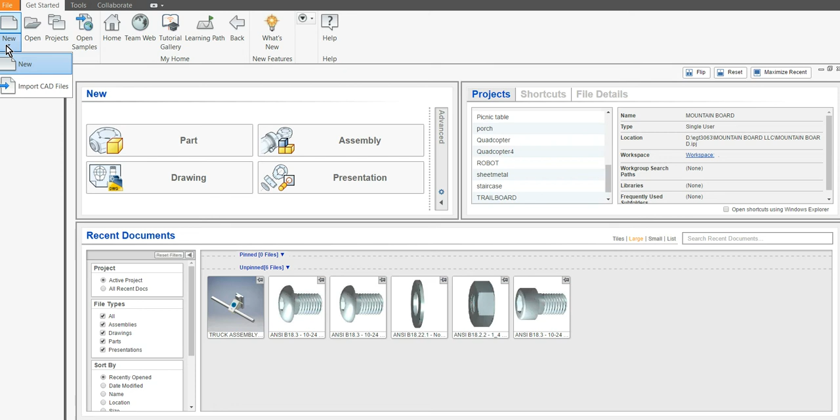Okay, so we want to start a new assembly. You can pick this button or hit new assembly. When you pick new assembly, make sure you don't pick a weldment. We're not doing weldment IAMs yet, we will be eventually. Just make sure you pick a standard, or the one over here as well works too, so just don't pick weldment yet. Just like don't pick sheet metal part unless you're doing sheet metal. It's saying that it's going to be an ANSI.

And the first thing we want to do is place the board in. You always want to place usually the part that has the beginning, or the bottom, or has the most parts attached to it, and that would be the board.

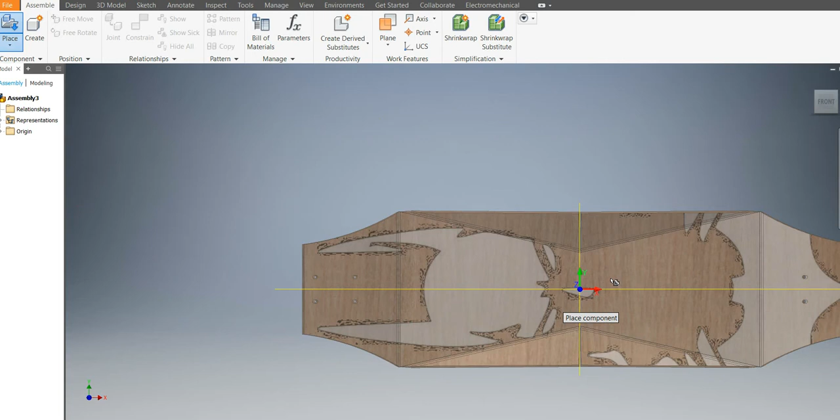Right there it is. Hit open, and this is a big deal, a lot of people forget to do this. The first part that comes in, always right click and place grounded at origin. Don't forget to do that.

All right, now I'm going to turn these planes off here in a minute and show you how to make a couple in case you run into that too, because that's another problem some students run into.

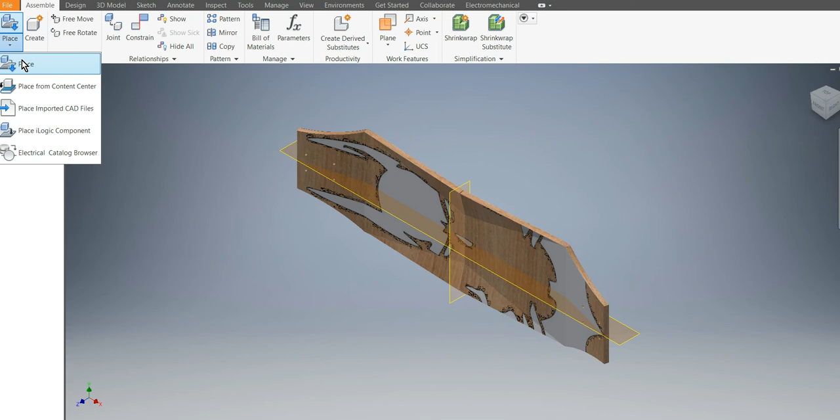Next thing we want to do is bring in our sub-assemblies that we made. Hopefully we don't have any problems with it. If we do, I might have to pause the video for a minute. So I've got my mountain board truck here without any nuts and bolts in it.

I'm just bringing in one of these because we're going to mirror them over. I'm not bringing in two, even though there's two there, and I'm doing that on purpose. And I'm going to place my wheel assembly. Notice it says IAM for wheel assembly, right?

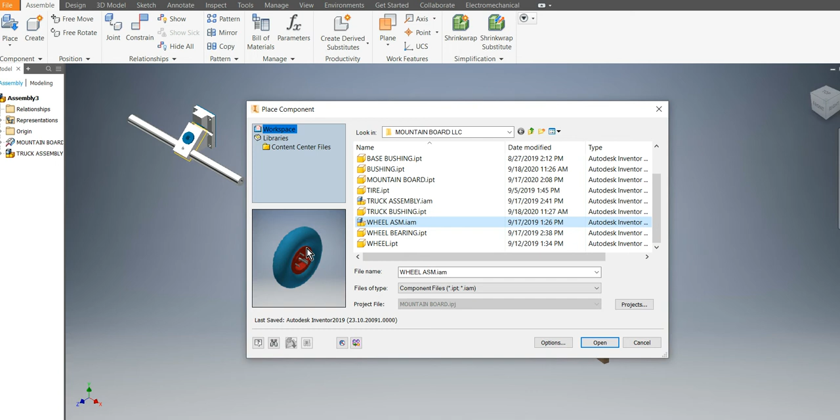Okay, I had a little bit of trouble with the wheel, so I'm going to show you what happened. So I'm bringing in my wheel assembly. I did put nuts and bolts on it the other day, and see what happens — I must have done this on the server because it can't find a 1/4-20 1.5 inch bolt. It says it doesn't know where it's at, so I'm just going to skip it. And it can't find the 3/8-16 bolt in there either, it must be a nut, so it can't find it. That's all right, it just says it can't find it.

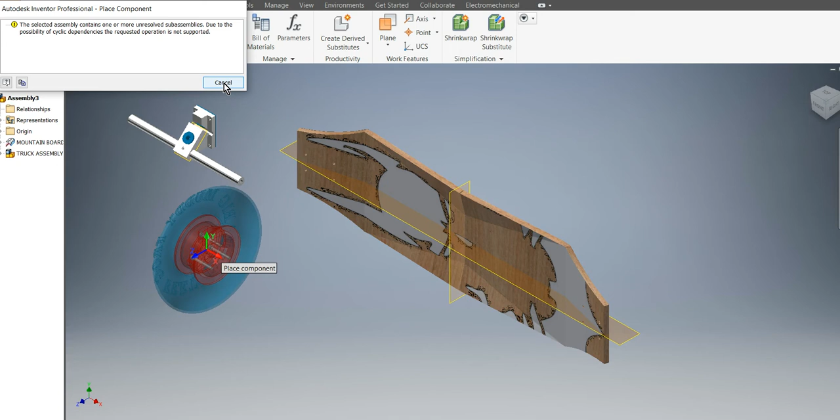What I was talking about with that wheel was that, just as I was worried about, it had problems with the nuts and bolts. So I actually had to open the wheel itself in a separate file, just open it and delete those bolts out of there so it quit giving me errors. So you might have to do that if you have extra bolts in your subassembly and you can't find them back.

Okay, I'm just bringing one in again. Let's put some bolts on. Let's do the wheel first, put a few bolts on it. We'll save it, and then we'll bring it back in.

So to open this subassembly, it's real easy. Just double click on it there, or double click on it here. Okay, now I'm in this subassembly.

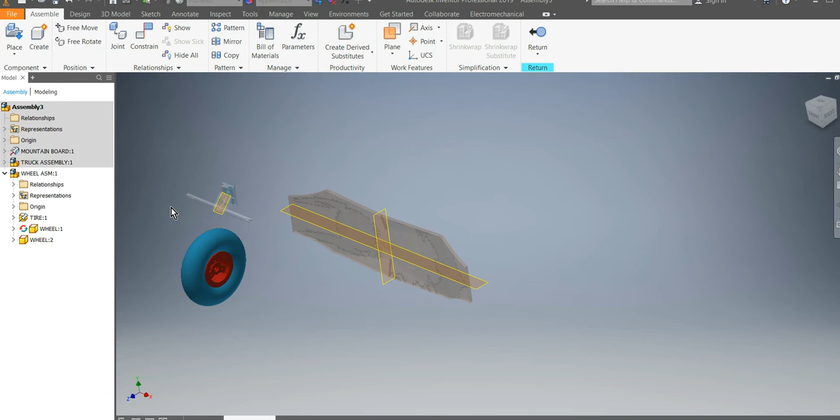These are grayed out. Incidentally, the way I changed the colors of these items, I just hit return to get back to the thing. I'll show you real quick here. So if I want to change the color of an item, I can just double click on that part. It opens that part, or opens that subassembly. Now I'm double clicking on that part and I'm in that part. I can just change it to whatever I want color wise.

Medium sky blue. Okay, it was already that color anyway because I did it in the subassembly, but you want to do it in a part, and then you want to save it if you want to keep it that color, before you return.

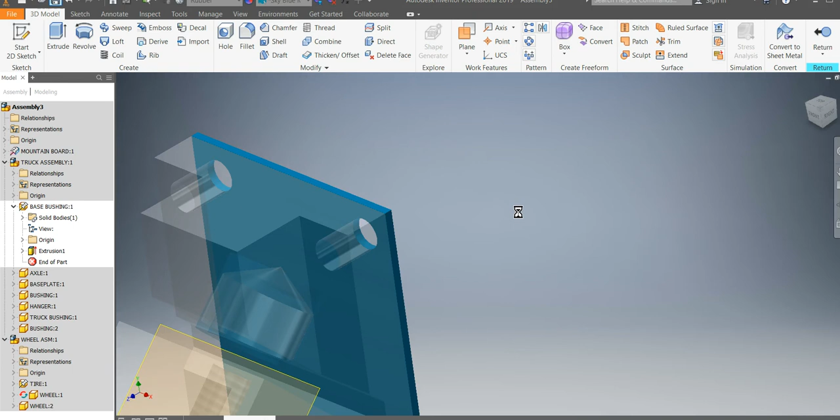Okay, now I'm returning to the subassembly. I just hit return, I'm back in the subassembly. Hit save. Now I'm going to return to the main assembly, because you got to remember you're stepping down here. I was in the main assembly with all these and subassembly, so now I always save again too, just to make sure everything keeps saving. Return. It should say yes to all when you do it anyway. But that's how you change the color of any item.

Just double click it. I'm going to add some bolts to this subassembly, so I'm going to double click on it. Now I'm in this subassembly. Notice all the parts are there. I'll have to return to get back into the main assembly. The subassembly is just like a big assembly, except you can bring one piece in at a time.

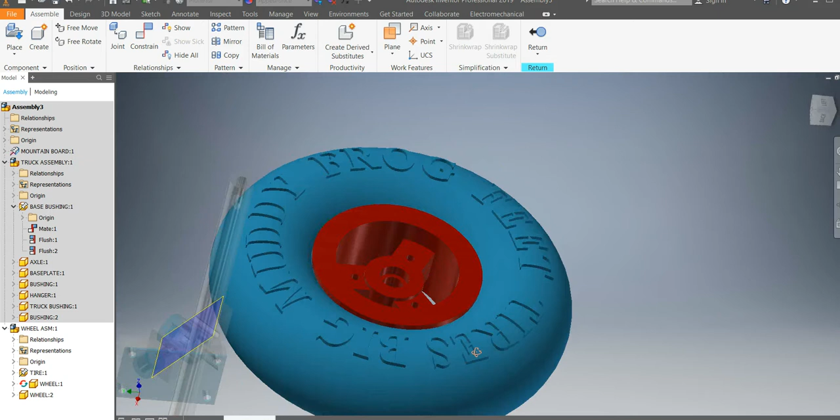Okay, this wheel looks real good. Everything looks right on it. This is the outside of the wheel, so I'm going to want to put the bolts there and the nuts on this side because it just looks prettier, right? So let's do that. We'll go to drop down to place from content center.

If I look at the example here, it says number—what bolts are there? There's a nut, 15. There's bolt number 14 right here. So 14 and 15. It says quarter 20, 2-inch long, hexagon socket head cap screw. That's the bolt. The nut is number 15 in the item number, right? There's 12 of each of these because it's 3 in each wheel and there's 4 wheels. It's a quarter 20 nut, hex nut. It's real simple. All right, so let's make sure we get those only.

So you always look back at your bill of material to figure out what nuts and bolts you have. It's all in here on the balloons. So you can track it down by item number. The balloons match the item numbers, quantities match how many are on there, and of course the parts list has the type in the description.

Okay, so let's go back to Inventor here. All right, so what I did, it remembered where I was last time I was in here, so yours probably looks like that. So first thing you want to do is double click on fasteners, okay, and then bolts. Notice there's a lot more other items in here that we're not getting into: tube pipe, shafts, sheet metal, molds, washers, rivets, everything. There's also nuts, bolts, belts, and everything else in this thing.

Cables, harnesses. All right, so we're in bolts, and it says socket head on that bolt. So we want to get that, that's an industrial bolt. So you would see these all over the place. They take a little Allen wrench to use them. You see that? Looks like usually typically like that, with a little Allen wrench hole in the top of them.

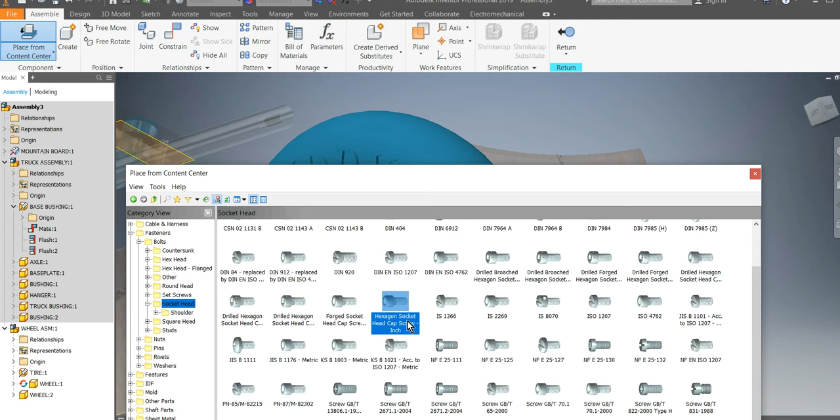And about halfway down is just a standard hexagon socket head cap screw. These are the kind you could buy at most hardware stores, Rural King and so on. Okay, I'm just going to double click on it. Now be careful, if you zoom in too big, it'll try to put a giant one in here. So what I'm trying to do is hover over that circle, not the cylinder, just the circle. And I waited too long, so of course it gives me different options. So I'm picking that circle.

Now you get several options here. One is auto drop, which is fine if you designed it perfectly to match the programmer's intent here. But I always make my bolts true size so they line everything up. Now in the real world, you'd usually make the bolts a little bit oversized and you'd have dowel pins to help line this thing up. But that's a lot more work, so we didn't do that. And it doesn't make a big difference on this plastic wheel that's 3D printed.

Okay, it's got an inner tube on the inside of it. So this will auto drop the wrong size bolts. So the first thing I have to do is change size, which is that one. And there's different ones here. You can change size here by dragging; that will change the length of it, but it won't change the diameter of it, I don't think. Let's see. See, it's giving me a 10-24, and this thing's supposed to be like 2 inches long. I think 1.5 inches is plenty long, so I'm only going to go that long.

But I still got a problem. It's still the wrong size. It's supposed to be quarter 20 because it's making it undersized. Now it did auto drop these even when I picked change size, which is awesome. Sometimes that doesn't work. Notice it auto dropped in 3 spots, even though I just picked one. So there's my quarter 20. It already is 1.5 inches because I drug it that far. It's coarse instead of fine. It's what I want. I hit OK. So those are done. Now if it doesn't auto drop, then you got to do it 3 times.

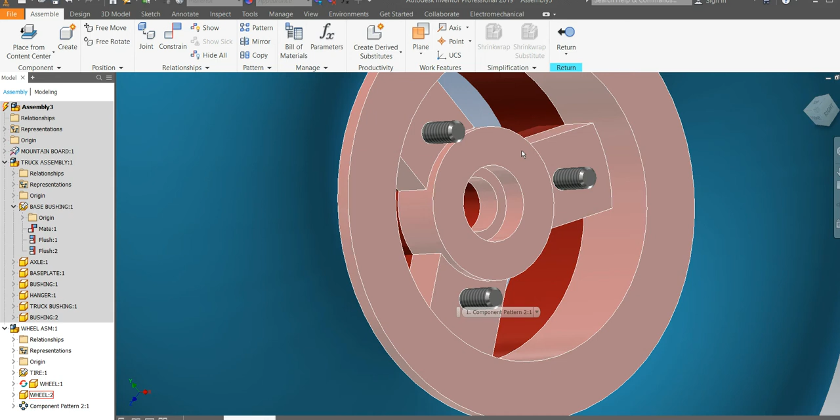Okay, so that's finished. And if it's on your laptop, they'll stay there. If it's on the network, when you log off, they're going to be lost, and you're going to have to hit skip when you load in this assembly, because it won't be able to find that file because they'll be gone. All right, so now I'll put the nuts on too. It's kind of the same way. Place from content center, and it's awful slow, isn't it? Okay, so there's the bolts. I'm gonna shrink that down a little bit, and there's washers, nuts.

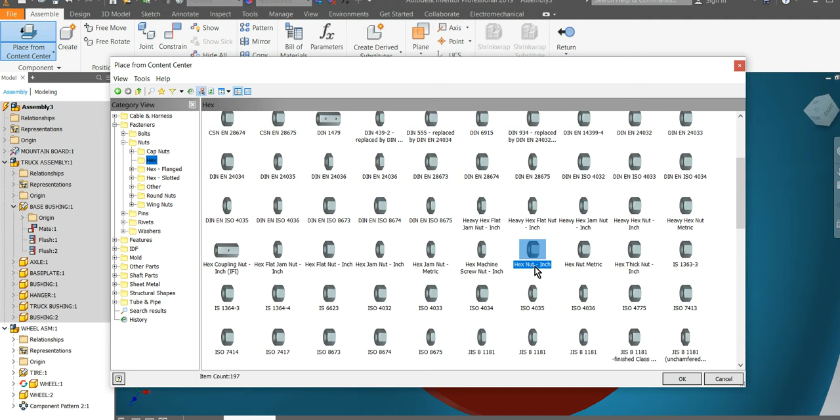Okay, hex, just plain old hex, nothing fancy here. I usually try to pick the standards you'd see everywhere else. So hex, nut, inch. Doesn't get any simpler than that. Okay, and now it tells you what to look for. Select a threaded cylinder. Okay, there we go, got it. And now what's it say to do? Select a planar face. Now that's the face the base of the nut needs to be on, which is right here, not the base of that, right?

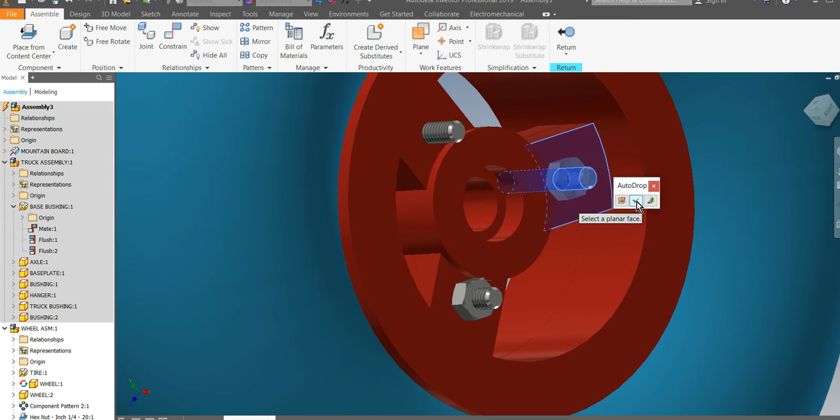Okay, and now auto drop. I think I can hit check mark here. Let's pray it works. Should. Nope, it didn't. So anyway, pick that one. Pick this face. It's semi-automatic, right? Cylinder and face. Make sure you get the right face. Don't go too fast and get the wrong face. Then you have nuts in the wrong place there. So right click and hit apply when it's all done.

And you can change the size here, I guess, a little bit, but it did it right, so I'm not going to. Okay, and it wants to do more, so I can just hit escape at this point because they're all in there. All right, now we've got our nuts and bolts in there. Now I want to make sure I save this before I return. So save. So this subassembly now has nuts and bolts in it, and it'll stay in there until you log off of VMware. Okay, return.

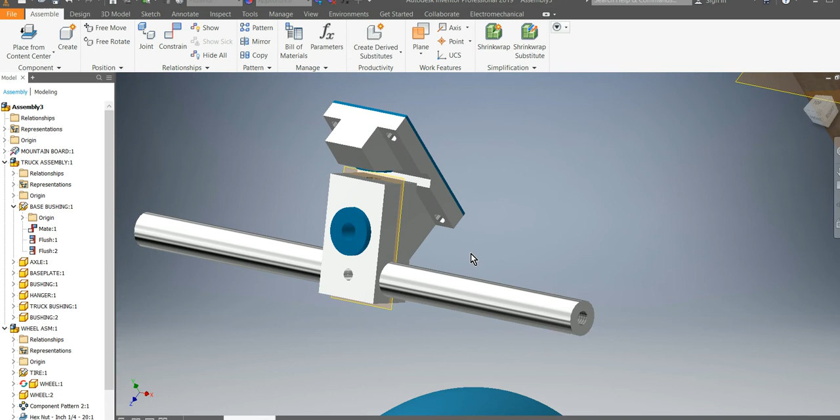So now I'm back in the big assembly, and I have nuts and bolts. You would do the same thing for this. You don't have to, but the nuts also go in this, and you can see them on a bill of material. All right, there's a bunch of bolts and nuts holding this whole thing together.

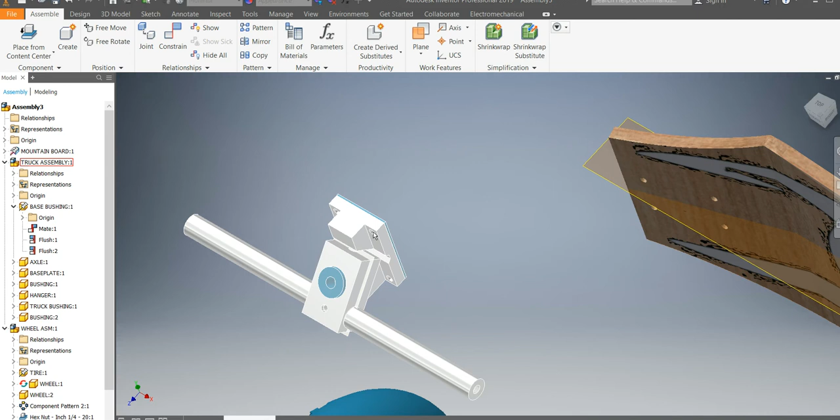All right, I'll show you how to do a few more here in a minute. I think we will put the nuts, and I do want you to put the nuts and bolts that hold this base plate to the skateboard. So let's go ahead and put them in there too, because I just want you to get some more practice on it. And so I'll do it as fast as I can here.

So place from content center, place from content center. Okay, if you look at bill of material from memory, these are 10-24 button head cap screws. Okay, so what a button head is, it's round, so when you put your feet on this skateboard here, it doesn't bust your toes on it. So they are in, of course, fasteners and bolts, and they're on a round head. You'd think it's a socket head or button head socket head cap screw, but they are in the round head.

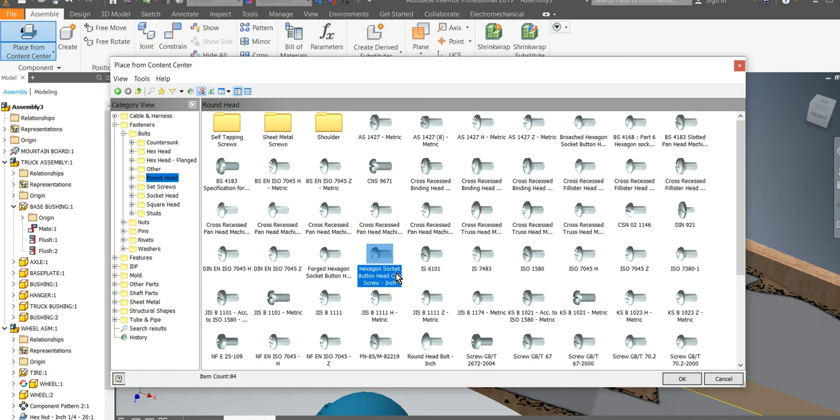And I think it's about 4 rows down. Here it is, hexagon socket. So it's similar to the other ones except it's rounded. Okay, that's a hexagon socket button head cap screw. These are also, you'll see them like every maintenance shop has a million of them because machines carry them. Okay, now this one, I don't think it might pick the right size. Yep, it actually is picking the right size. Hallelujah. All right, so I'm gonna pick that, and now I should be able to hit auto drop because it looked like it picked the right size.

It's 1 inch. I don't think that's long enough. Oh boy, better look at the drawing here. Thought I had my memory here. 18. It is 1 inch. Okay, I guess 1 is long enough. Okay, and it says it's, how long was it making it there? It's making it 1, good. I think it made it the right size. So if it doesn't, drag that red thing along until you get 1. If you have to change the size, there's the change size.

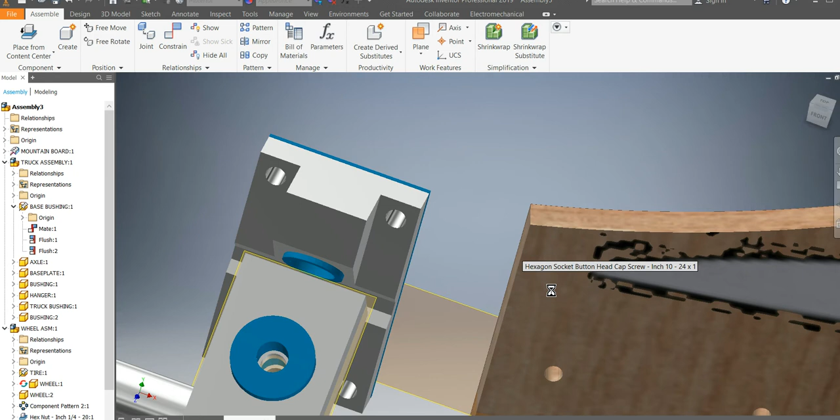It's going to drop all 4 of them in, hopefully. Picked auto drop there, and you can see the red circle showed up. Check mark. Yep, looks good. And our coarse version of them. 1, 2, 3, 4. Now I'm gonna just right click and hit apply, or I should have right clicked, pick done. Okay, I got one sitting in nowhere land, so I should hit done. All right, so pick that and delete it. Let's do keyboard. Okay, left pick it with your mouse and hit the delete to get rid of anything.

All right, so it looks pretty good. I've got most nuts and bolts in this. There's a whole bunch of them yet in this, but we're not going to do them. All right, so let's try to put this thing on here. If you have these planes available, so you can mirror things, that's awesome. Say you don't, because we're going to basically put these on the correct location and then mirror them around. If you don't have these planes available, there's a couple ways to make them.

All right. So this is a board. So I go over here to my browser and find board. It's the first one I put in. And notice it's grounded. All right. It's got the grounded mark on it. So I'm going to expand everything until I see those planes. There's one plane right there. So if you ever want to hide them, well, this one's already hidden. These two are not hidden. I kept expanding. Now these are the two mid planes. I must have opened them when I saved them.

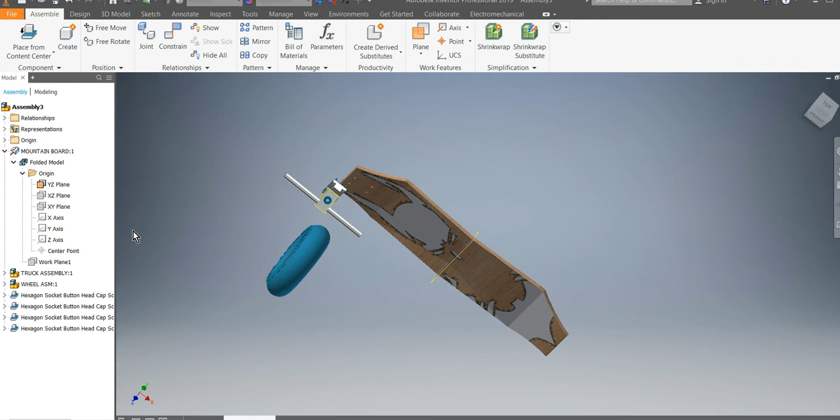So if you want to make them visible and invisible, you just pick on them with left mouse and right click to make them visible, and left click to make them there. Now they're invisible. Okay, so I'm just right clicking to get that menu. All right, so I want those visible. Say I didn't have them though. I got kind of lucky they were in the origin there. But you should have them because you made the board. But if you don't have them, you can make the planes too.

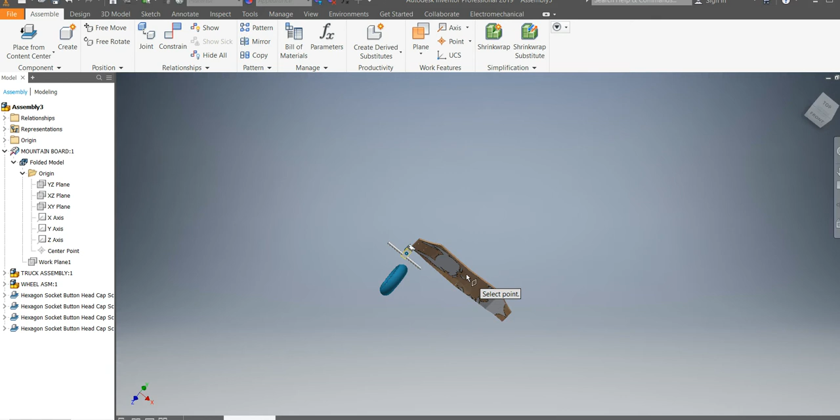Remember how I talked about making a plane with 3 points? All right, so let's make one that's in the middle. So I go to plane. Two easy ones, mid plane between two planes. You could pick two planes and make it in the middle of that one. If that doesn't work, the tried and true method is always the midpoint of 3 lines that cross each other. So 3 points. So as long as I didn't mess up designing this, I can pick the midpoint of that. Any 3 points that are going to make this plane.

I can't see the bottom of it. There it is. So those 3 points split this plane right in half. See, and I could do the same thing from here, here, and down there to get the next one. And I'm not going to do that. I'm just going to turn it on. But if you need to make another one that splits it, you can always do that with 3 points too.

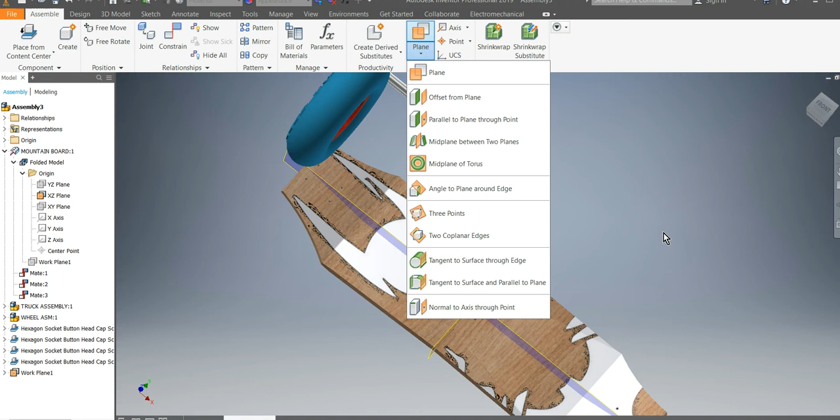Okay, or use a mid plane. There's lots of options in here. I use that one a lot. I use 3 points a lot. Offset from any other plane, however many inches you type in, use that one a lot. I don't use the rest of them very often. Once in a while you want to make a tangent one. Okay, or a normal through. If you get real complicated stuff, you might have to make something normal through a point. There's a lot of ones that you have to use once in a while there.

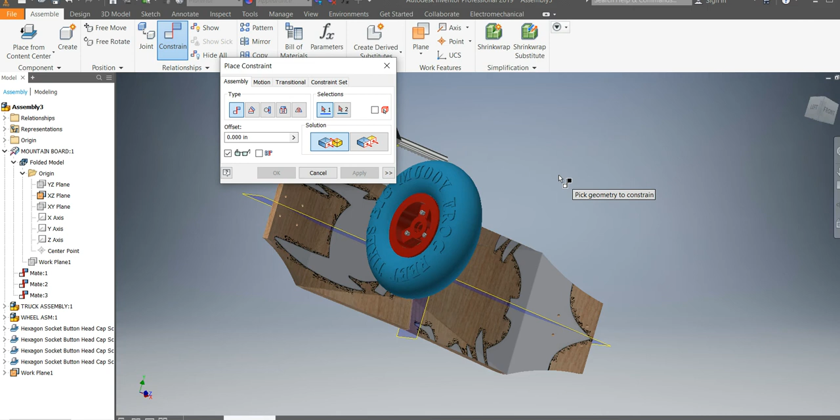Okay, so we're ready to put these parts on there, I think, and mirror them around. There's a couple tricks here. First, we need to constrain them. So I don't know, I guess put the wheel on first. That way it'll lock in. So there's a couple things here you don't really know about.

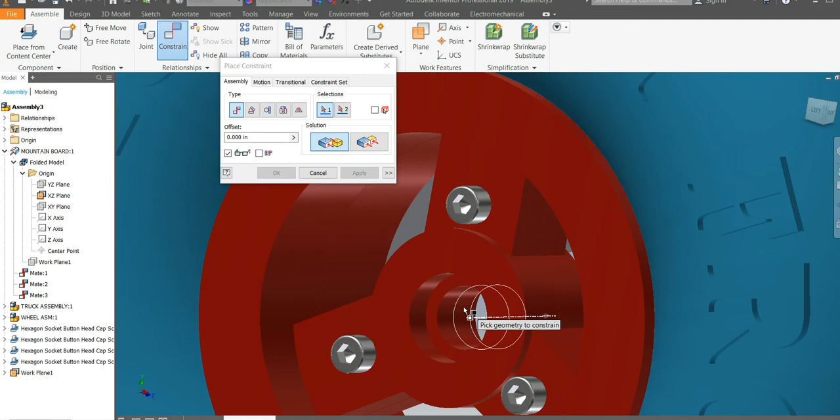So this bearing, there's a bearing that sits in this cavity. Okay, so we didn't put the bearing in it because it's hard to find it in the place from Content Center, and it just doesn't work as perfectly. So I'm not putting it in there right now in the interest of time. But there would be a bearing, and so the shaft sits flush with right here, and so does the bolt that holds this thing on. Okay, because there's a bearing that takes up this whole cavity. So just so you know that.

All right. So first thing we want to constrain. Let's just constrain the wheel to the shaft. So we find anything with a center line. See that center line I got right there? Okay, and a center line with this one. Okay, and then a lot of times you got to pick a line. Okay, and apply. As long as those aligned, it'll let me put it about anywhere I want. Did it spin? It spun it around. Okay, see how? I'm glad that happened. I can show you hopefully how to fix it.

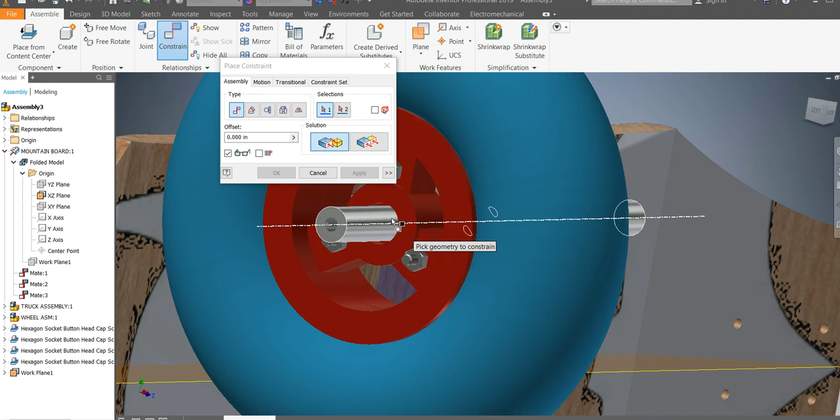Notice now I've got my nuts and bolts on the wrong side. Well, I've got a couple options here. I could put this wheel on that side and then mirror it later, and it'd be fine. That's what I'm gonna do. Or another option is I could just pick this face and this face, and it should flip it. Apply. And they gave me an error because when I aligned it, it didn't like it. So I'm just gonna pick this face in the back of that other one and take the easy way out. I could delete that constraint and pick opposed on the other one. It probably would have worked.

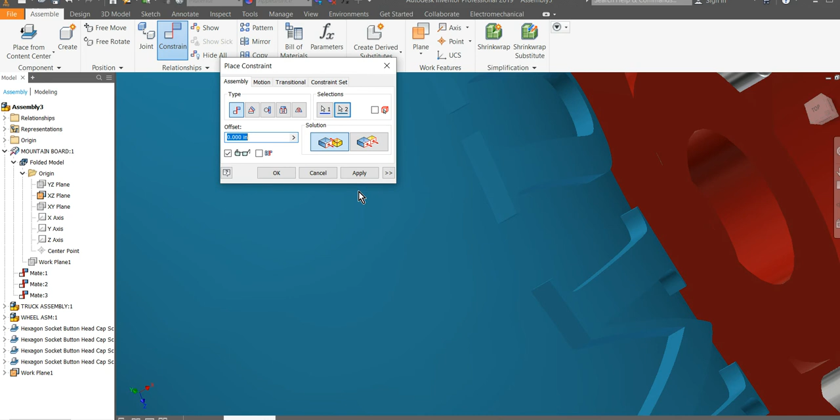Apply. Okay. Alright, so that constraint I was talking about, all these things like this wheel assembly, if I expand it, those constraints I made are always over here, and they're the last things I did, so they're right here. There's the first one I did that was causing a problem. You can right click on that and edit it, and I probably should have picked opposed, and then it wouldn't have flipped it. Alright, so you can always change things after the fact.

You can always go in there and delete them too, because if you keep doing more and more constraints and not deleting the ones you just did, of course you're just going to break the crap out of it. So it only took 2 constraints to fully lock this wheel down because it's supposed to spin. See how it's spinning? Okay.

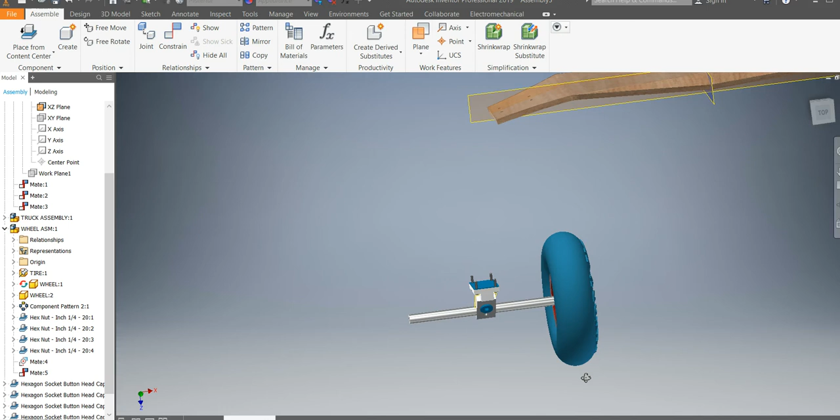And use colors to make your design cool. I know it's hard to buy things that are blue wheels and so forth, but it does make them look nice. And you can buy some things like that if you sell them, if the colors bring really good views to your designs. All right, so let's mirror this over to the other side.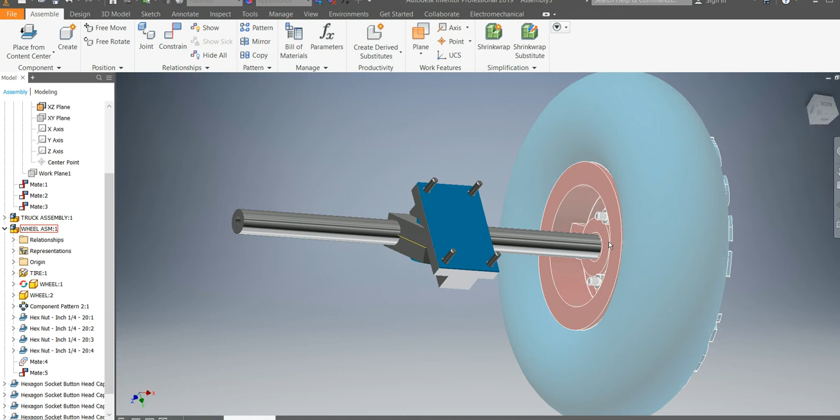You can kind of pick your battle, which one you want to do first, right? I'm gonna go ahead and put this on the board first and then mirror it, I guess, because it'll just be easier. So I'm gonna hit constrain now, and I'm going to have to line up this base of that rubber bushing with the back side right here, right? And it doesn't matter if you do this one or that one, they're the same thing anyway, so I'm just going to pick this one. Okay, and that lined them up, hit apply.

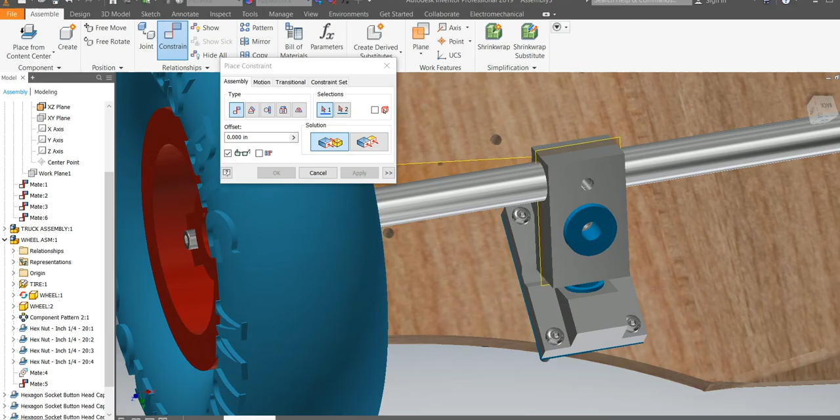Now you got to start thinking a little bit. Okay, so if you look at the trail board, the big bolt that holds through the two big bushings is on the inside of the board. See that big bolt's on the inside, so make sure you do it, because you can do it backward and it actually does work, but of course when you lean on your board it won't turn very well, but it will fit on there. So the big bolt going through these two big bushings right here is on the inside of the board.

So to do that, you have to put the bolts where they're theoretically possible, or Inventor will give you an error. So I'm going to put this bolt in that hole, and then I put this bolt in this hole. I can't put this bolt in this hole and then try to put this one in this one, or cattywampus over here. It just won't reach. It won't work. So you got to think about things when you're doing them a little bit, right?

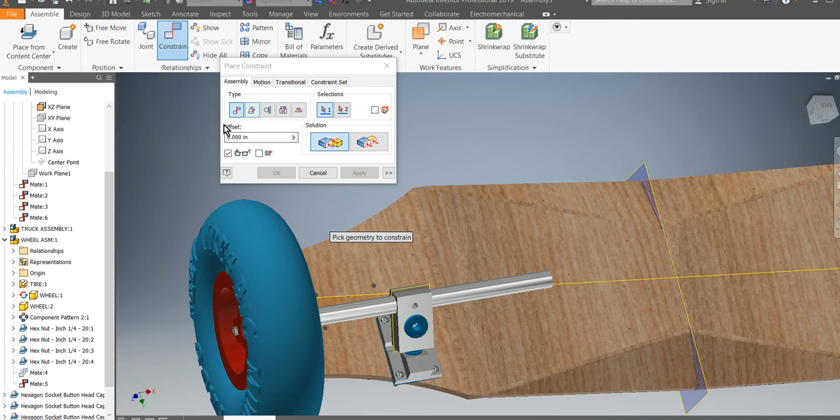So I'm going to pick this cylinder, and I've already got planes lined up, so I know they're the right height, and this cylinder. Tape and apply. Okay, and I'm going to close this so I can actually see. You can pick through the part, but it's pretty hard. So I just closed it so I could spin it a little bit and see everything a little bit better. Go to the back side so I can see it even better. Constrain. And I've got that one in, so I've almost lost where I was at here. That cylinder and this cylinder. Okay, and if you pick the wrong one, of course it won't work because it's not possible.

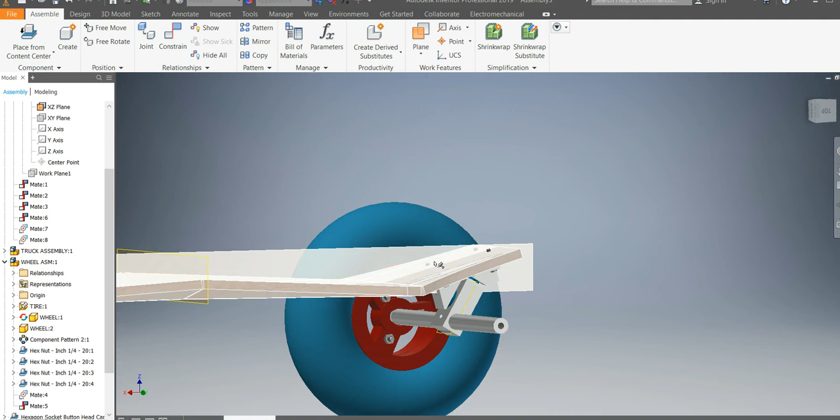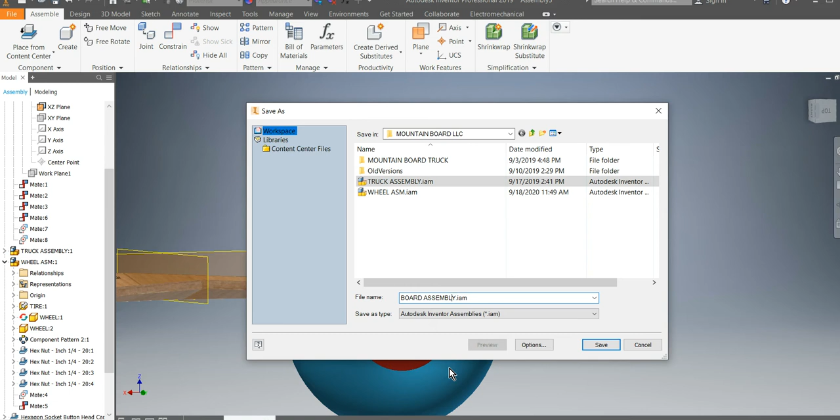Alright, so now I've got this thing on the bottom, and I've got one wheel on it. And that's about the hardest part. It gets pretty easy after that. I've got lots of center planes and everything. It's a good place to save probably. So save. I'll call this board assembly, I guess. All caps. Now mine shouldn't lose the nuts and bolts. I always say yes to all. You always want to save everything. I don't know why you'd want to not save everything. Okay, it's saving everything now. Alright, I think we're ready to mirror.

Now one thing about when you mirror things: all the parts that are mirrored together will keep all their constraints together. But I'm going to mirror this across the shaft. Now this is attached to the shaft, but I'm not mirroring the shaft because I'd end up with two shafts. Well, since I didn't mirror the shaft, it's going to lose the constraints between the wheel and the shaft, and you just have to reapply them. That's the way it is. Either that or don't ever move them. But the right way is to reapply them.

So mirror, and I want to pick on that subassembly. Okay, and if it's a subassembly, it'll pick them all, which is cool. That's one of the reasons I put the nuts in there before that. Notice that most of these are green, except for the nuts and bolts. Make sure you pick that so they turn yellow. Because otherwise, unless you want a new part, it will actually create a new part with an MIR on the end of it, and you'll have a whole bunch of new files.

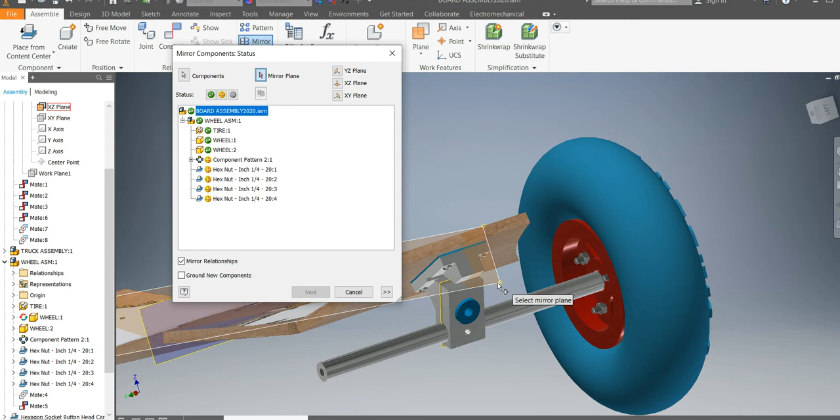Okay, I'll show you. So if I leave this green, it wants me to grab a mirror plane, so I'll pick a mirror plane, that one that's actually in the middle that's going to mirror across. Okay, and if I go to next, see all these new parts I'm getting? I don't want them. It's actually going to make them. So where's back at? Return to selection.

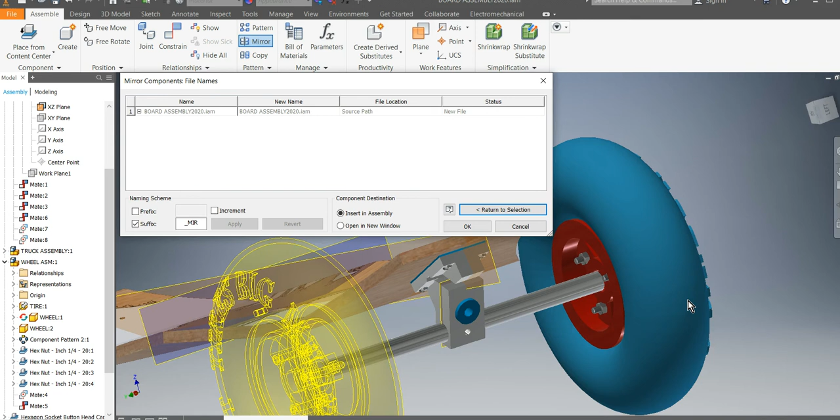Make it yellow. Next. And if you're going to modify them and put holes in them that are different than this, that's the way to do it. But rarely do you do that, which by default it was the other way. Alright, there's no new parts, so hit OK. So I've got that in here.

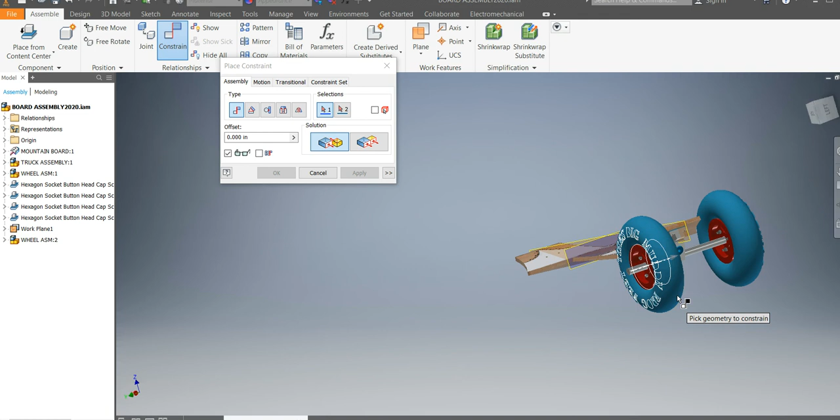Now notice this thing moves. It's not locked on anything. We just lost everything. Well, that's because we didn't mirror the shaft. We just mirrored the wheel. Okay, so now we've got to constrain it again. Constrain, it's pretty easy anyway. Pick that, pick a cylinder, apply. And hopefully it went to the right one. It surely did. It didn't flip, did it?

Good. And then I'm gonna drag this thing over here so I can see what I'm doing. And then again from this face right up. It's not letting me pick that, so I'm gonna cancel. Drag it out of there, maybe because I moved it. Constrain this face. I did get the other one already on there though, and then this face. Okay, make sure you get the right faces. I did that pretty fast.

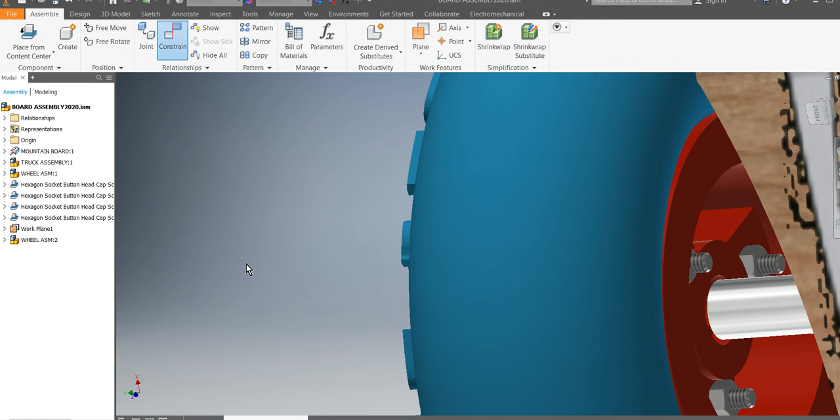Remember I talked about that bearing. See, I picked that one right. If you're getting that arrow, that means you've got the plane. If you don't get that arrow, you don't have the plane. So center lines on cylinders you're looking for, little arrows on planes. Apply. Okay, so this thing's done. Now this thing's together. Now we're going to mirror this whole system across here. Now the wheels will not lose their constraints next time when I mirror them across the other side, because we're mirroring the shaft with it.

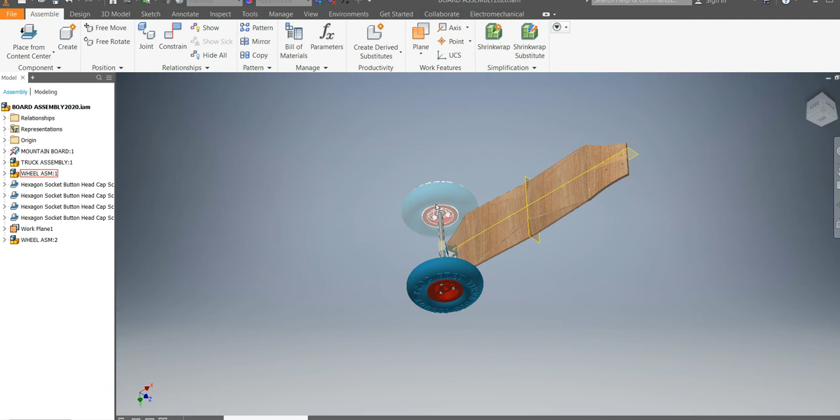Okay, now the base, which is getting mirrored, we had the constraints from the base here to the board, and those constraints will get lost because we're not mirroring the board. So you will have to redo them again, but it only takes a minute. So mirror. Now I probably won't do it, but I expect you to do it. Pick components. So boom, boom. Pick your 3 sub-assemblies. Okay, notice some of them are green. We'll go to the very top and pick the very first one, and they'll all turn yellow.

Right. And then for the mirror plane, make sure you have the right mirror plane to go across and hit next. And if you do it all right, no errors, it should work real nice like that. And I've got an error. It's just saying some of the components failed. If you scroll down here all the way, it says relationship is inconsistent or suppressed. It lost basically the constraints, but that's fine.

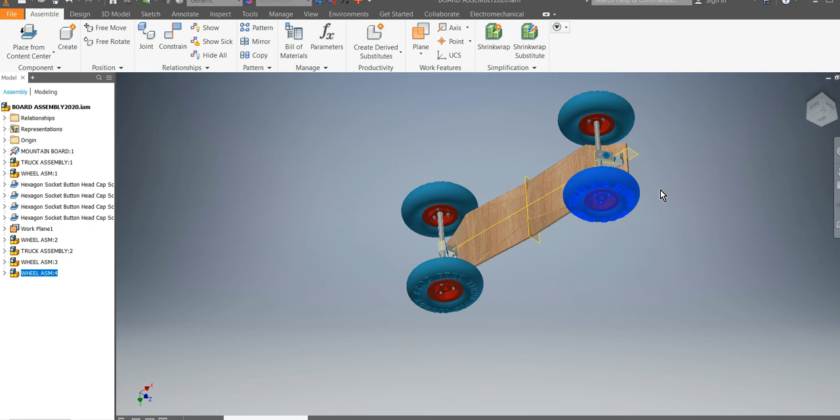Okay. So again, you can move this thing. Well, it's halfway broke. It doesn't like it. All right, I'm just going to leave it there. If yours doesn't move, call it good. If it moves, reconstrain it. And if you break it, you can always hit undo. All right, so that's pretty much done. Looks pretty darn cool, right?

All right, so a couple more nuts and bolts. We've got the washers. Did I forget to mirror the washers? Well, when you're doing it, also mirror the nuts over there. Okay. Don't forget to do that. All right, I'm also going to put the washers and nuts on this side, right? And I noticed I did this wrong, and if you followed my wrong example, I'll take it. But the bolts, I shouldn't have put the bolts in first.

I should put them in second in reality, because I want the button heads on top so I don't bust my toes on those nuts. Okay, so that's just a minor little error. I'm not going to make you redo it, but realize that the bolts should have probably gone in the top. When you're doing things like that, you always want to make it user friendly and not bust your toes on the little bolts sticking through there. All right, so I'm going to place some washers on here.

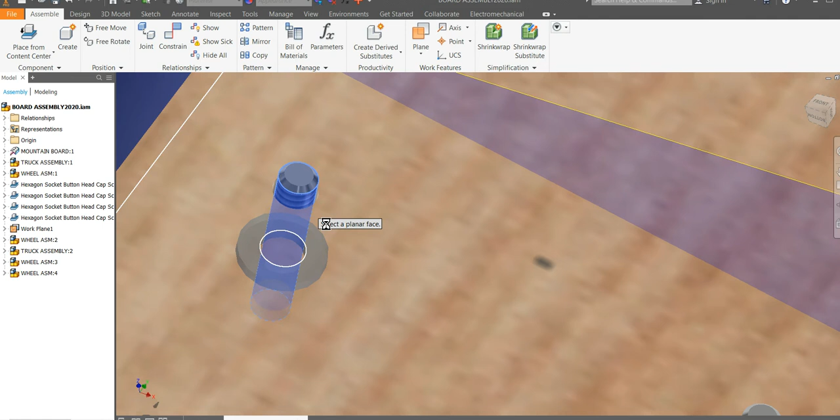Place from content center. Washers are kind of a pain. If you look in the drawing, it says plain washers. They're down here, and there's one actually called plain washer. Plain. And there's one called plain washer down here. I think they're alphabetized, so look for plain. There it is, P. Okay. And I think it'll make it the right size. I sure hope so. It wants me to pick a planar face after I pick it. And I'm going to pick change size just to see what size it gave me.

Oh, it's giving me millimeter. I really don't want millimeter. Cancel. Delete. So I picked it over there and delete, and I'm going to try again here. Place from content center. It should bring me to the same place. I must have grabbed metric, I guess. So don't do that.

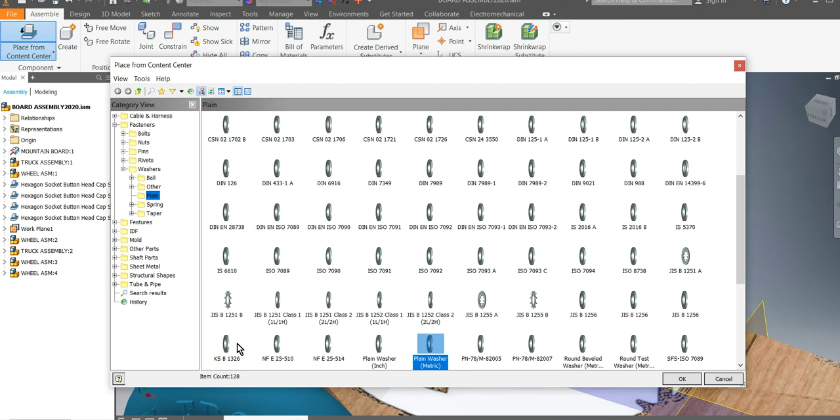Oh my god, it took forever to load. But yeah, you can see I grabbed metric. The faster you go, the longer it takes, right? Okay, let's try to do this right this time.

Inch. Grab a cylinder. Grab a face, and it's number 10, which is what I want. See that number 10 on there? Sometimes it tries to give you number 12, which I don't want. If I picked this cylinder right here, I probably would have got number 12. So if I picked the bolt, so I got the right one. I already picked that, so why is it asking me for this again?

Okay. Planar face. There it came up. I thought it did all that already. Maybe I missed it. Alright, so I'm just going to hit apply. And hopefully it'll put them all in there. Looks like it might, probably won't.

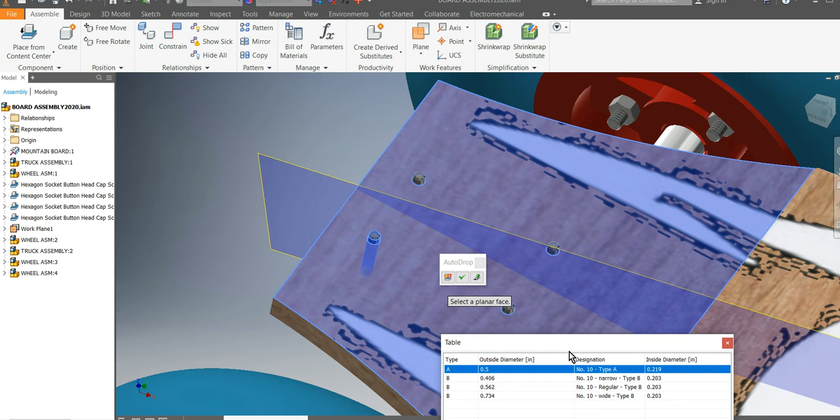Number 10, A is fine. I mean, if you want to make them oversized, you can pick B. They're all going to be fine. Either one of them will be okay. They're just washers.

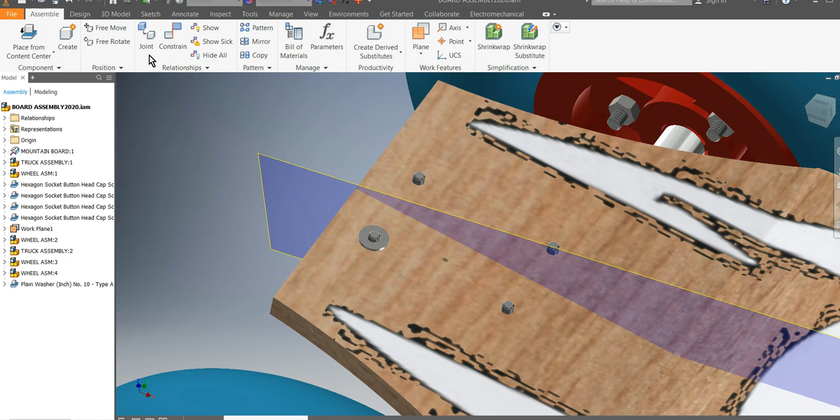So if it doesn't put them in there, I want you to put all of them in there. Okay, I'm just going to pick one in the interest of time. All right, so right click, done. Now the nuts done the same way. We already did a nut, so you should know how to do that. So put the nuts on there too.

Right, so I'm going to save this. Make sure you put the rest of the nuts and bolts at least in the board. Okay, for full credit, you got to have that. Save. I think that's everything.

Okay, and now we're going to put these in a drawing. You should know how to do a section view by now. Real easy. We've done plenty of that, and all the other views you should know all that. But you don't know how to do a presentation. So pretty quickly, I'm going to do a presentation, and then you have to put it into a drawing to match the other one with a presentation.

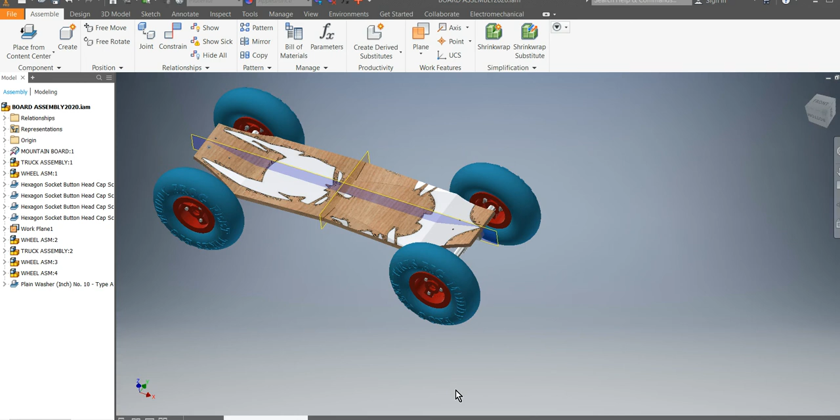Alright, so do presentation files real easy. You just go to File, New, and the bottom one's Presentation. Open that up, and then just bring in that item you just did. I probably should have saved first.

Cancel. And let's go back to this board assembly and save it. I should have saved first. Save. Presentation. Insert model. And it's going to bring in the one I just did. There it is. Open. Hopefully it won't give me any error.

It looks nice. Okay, so what you do here is this is an exploded view that you would give to like a customer. Alright. It's a little tricky, but not really. It's pretty easy. So tweak components lets you bring the parts apart. Try to take them apart like you would in the real world.

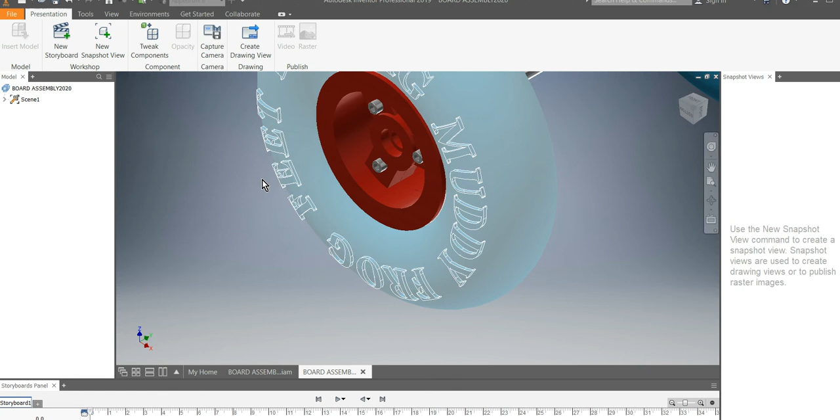Okay, so the first thing I would do in the real world is pull those bolts off, move them way out here. Then I'd pull this wheel half off. Then I'd pull the tire half off. Then I'd pull the inside wheel half off, and then maybe leave the nuts where they're at. And then the same thing with these. So I'm gonna try to do that.

It's a little tricky on getting it right, but the idea is to take it apart like you really would. Okay, and then you can make a little video of it and everything else. You have to take snapshots of it so you can put it in your drawing. That's what actually goes into the drawing.

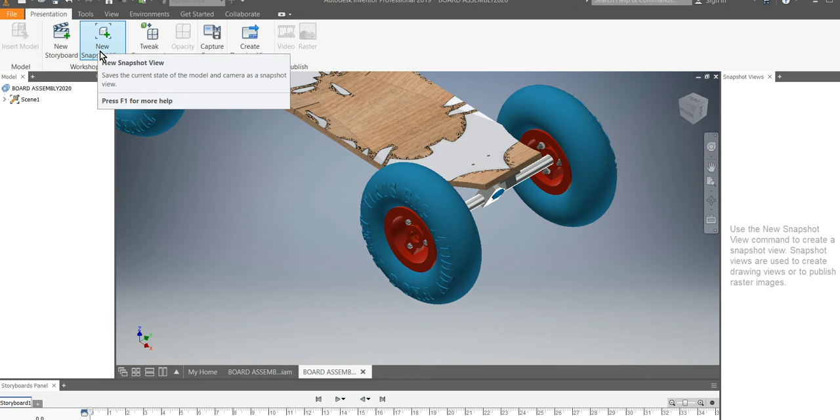So tweak components, and first one I said was this one. Hold down the control key to pick all three of them. Okay, I've got all three, and then grab the arrow that looks like it's going in the correct direction off your UCS. And then it's looking for a distance here, I don't know, 10. That's far enough out that I can get the rest of the stuff in there. I should have said -10, but over here in your browser is where it's at. So I'm going to pick on it.

Oh, I got to expand it first, sorry. And then expand tweaks. And there's the first one. And it should have been -10. Good chance to show you how to fix stuff. And you can always change it after the fact if they're not far enough too. Alright, so I'm going to pick tweak.

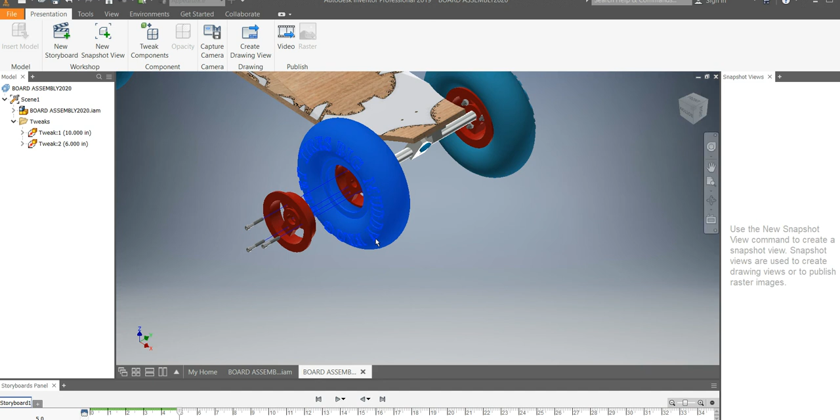Grab that wheel half, that way. Start pulling it with my left mouse, dragging it. I don't know, -6. Now I know I hit -6 there, but I guess somehow I missed negative. Okay, and then I'm gonna grab this wheel, tweak, pull it out there.

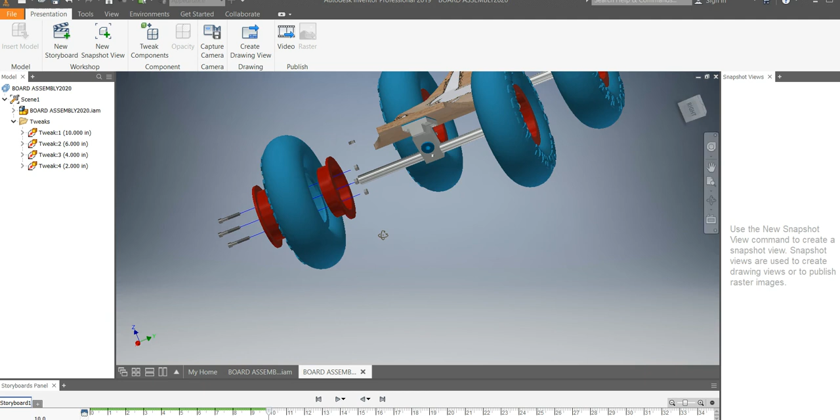Minus 4. Goodness gracious. All right, then this one, tweak, grab the arrows. Minus 2. Okay, and you can see that nuts look pretty good where they're at. So I'm leaving them, and there's an extra nut in there, looks like. All right.

How do I delete that thing? Probably have to go back to the subassembly. Go back, where's that thing at here? I think I brought an extra nut in there somewhere. I don't know, I don't see it on here now. Well, anyway, if you have something extra like that in there, go into your assembly, find it, and delete it.

I can probably open it from in here. I see visibility, I don't want to make it invisible because that's really not the right thing to do. I can expand it here and probably find it too, but I'm not going to right now. So if you got something like that, go into your subassembly and delete it.

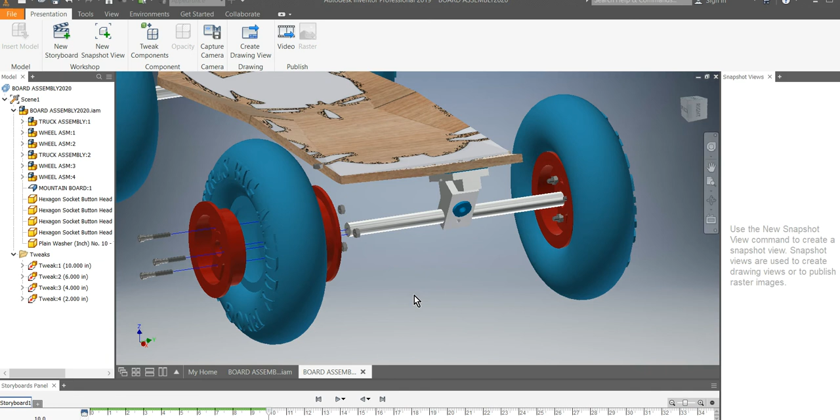Boy, that's driving me crazy. I'm going to pause this video and delete it. Okay, that nut was actually hidden inside the tire, so you didn't see it till I moved them apart. So that was a little tricky to find. Actually, I had to go basically pick on it and expand everything and find it in the browser and then delete it from inside the subassembly. So that was very annoying, but always a trick.

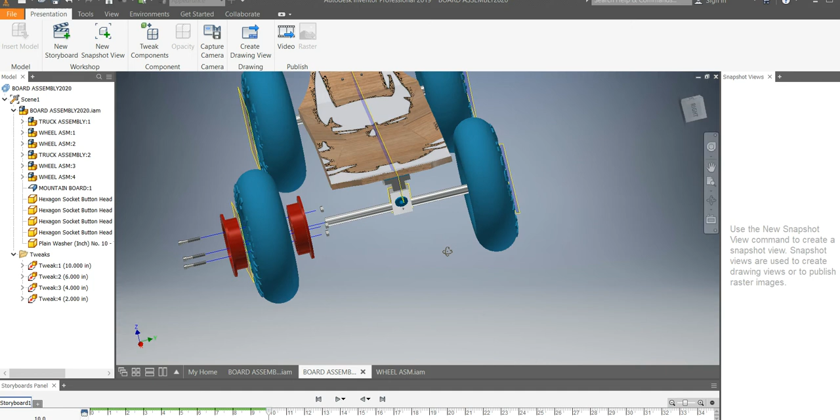Alright, so those are done. Now the next thing to do is basically pull apart this truck. That's a little trickier. Okay, so tweak components. So I'm going to grab this whole shaft system there.

And hold down my control and pick this shaft. Okay, then I'm going to grab this arrow and pull it back. I don't know until it gets all the way out there, so I don't want to go too far though. So about a minus 8 looks like.

Okay, alright, and now I can start taking this thing apart and probably pull the whole thing down first, and then is there any nuts and bolts?

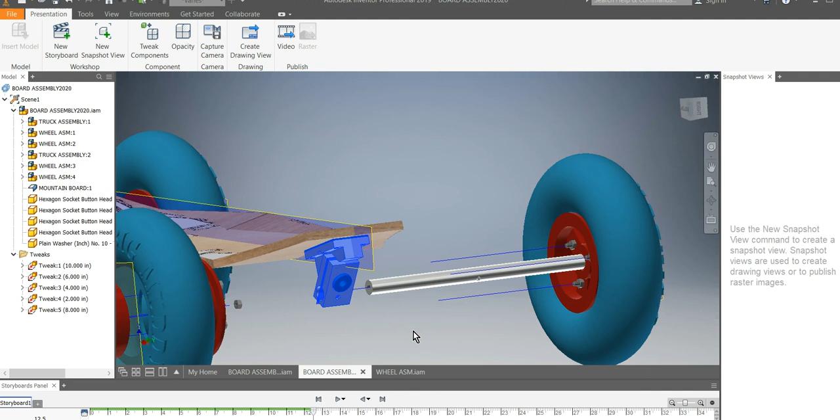I got it easy, so I'm going to window all these parts here. And tweak, and luckily it went by the base one. Pull them down a little bit so it looks like it's coming apart there. Okay.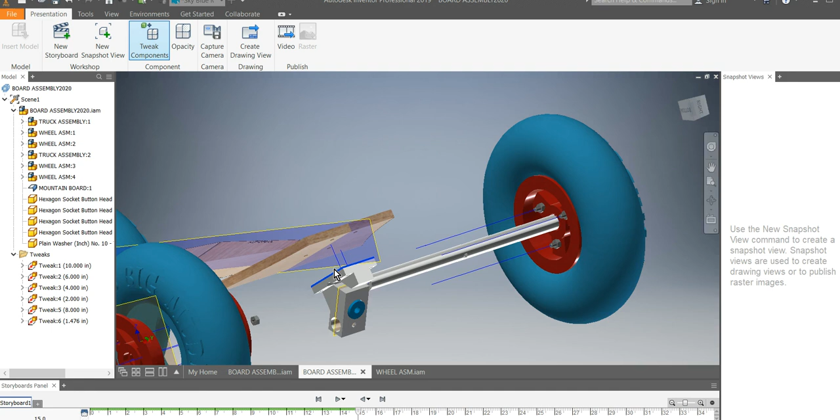And then I'm going to probably the next one, I guess. It'll get a lot easier once I get these done. Probably that one, tweak. It's getting to be a big file, so it's having some slowing down here a little bit. Minus 1, halfway over there. Okay, and then keep doing that until you get all the way apart.

So this one, hold down the control key to pick more than one. Look at that one, and tweak. Starting to lock up my computer. Who knows what's going to happen. Minus 2. We're getting there though.

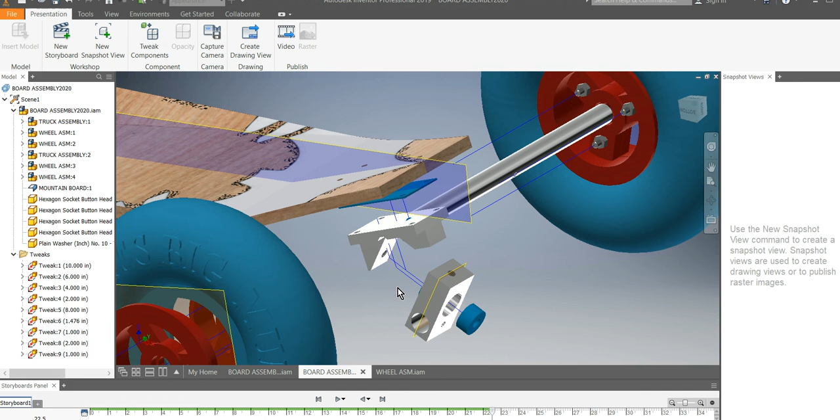Tweak. Minus 1. It doesn't matter what order you do these in, really. It's hard to figure out what arrow I wanted there. Minus 0.5, let's just bring it.

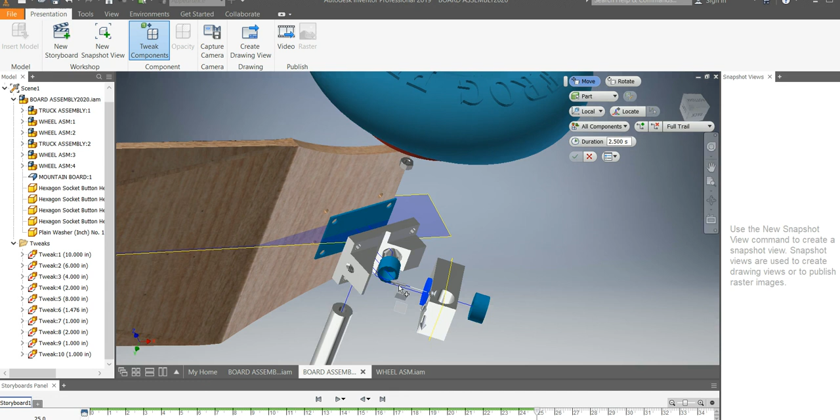So that was the last one I did, so I'm going to go down and fix it. I didn't get negative. That's not big enough. Okay, that looks pretty good.

Everything's separated, you can kind of see how it goes together. The arrows, the lines, are showing the customer how it goes together. So, alright, now get to a good view. It's like a nice corner view. Make it not a mile big if you can help it, so you can see everything.

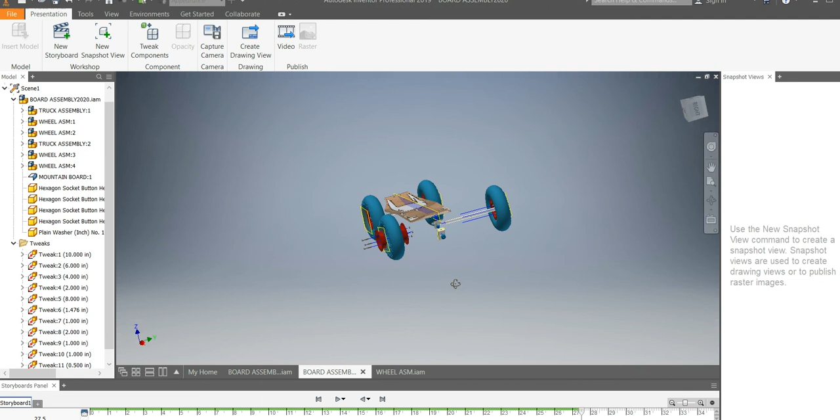It's kind of hard to get to a nice view. I want to twist this a little bit, but it's not too bad the way it is like that. Some of these things down here, so you can go all the way back together, you can go all the way separated, you can go a little bit at a time, one step at a time. You can create a video of it, so if you got a really complex thing to show the customer. Main thing I want you to do in this one is to create a drawing of it going apart. I still don't really like that. There, see, I'd like to.

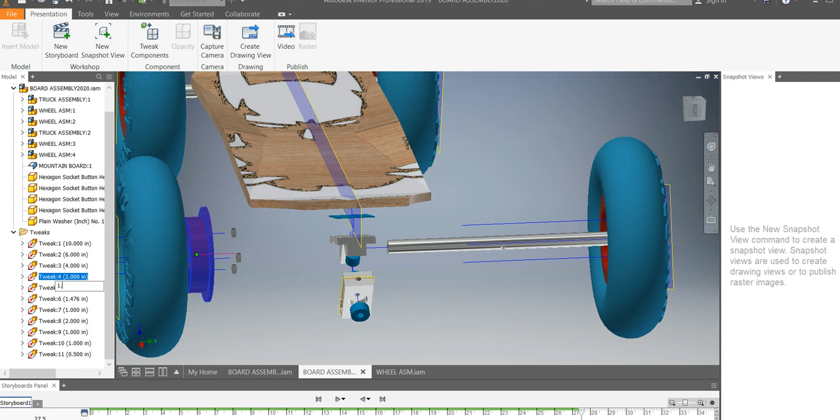That tweak is, if you just hover over them, you can see where there, that one. I don't really like that one. I wish it was maybe 1.5. There, now I can see it. Okay, so something like that, so you can see they're all separated.

And you probably want to get rid of these planes. I don't think they'll show up though in the drawing. Let's see, so now let's just leave it like it is. Now I'll come back to it if I need to fix them. So save it.

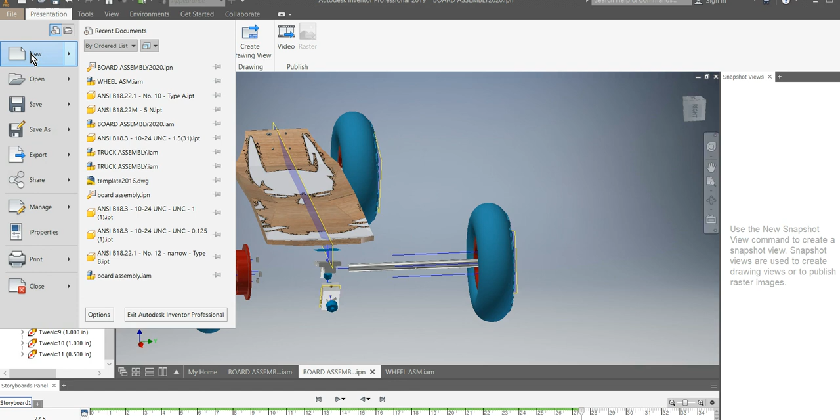And that's fine. Save. Okay, put it in your drawing with your other views. I'll show you that. A couple little things there, and then we're going to end this video. New drawing. So you guys open up your template and put them in your template.

All right, I'm just going to drop it into an existing one. And how big? Let's see here, D size is probably about right, and I think that's what it gave me. Yep, because you need something big on this. I think 1 to 3 works good. 1 to 4 is a little small, but so base.

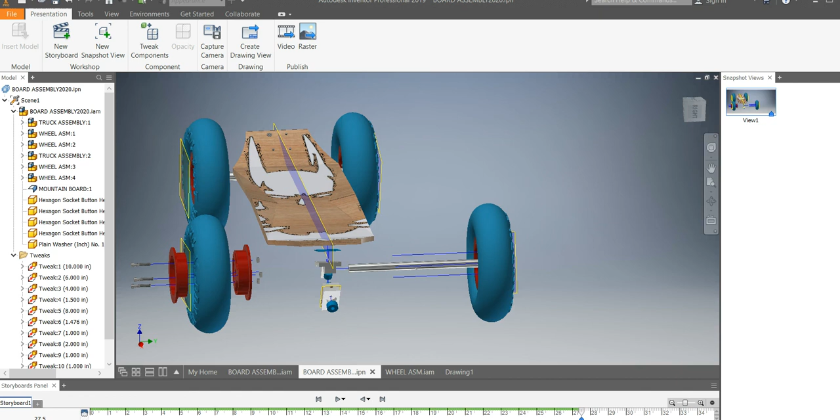Oh, I didn't make a snapshot. Cancel, I forgot to make a snapshot. Cancel, cancel. And new snapshot. Okay, all it does is take a picture of your screen. Okay, no big deal, there it is. It's a little wide, but that's all right. I go back over here to, that won't make any difference anyway.

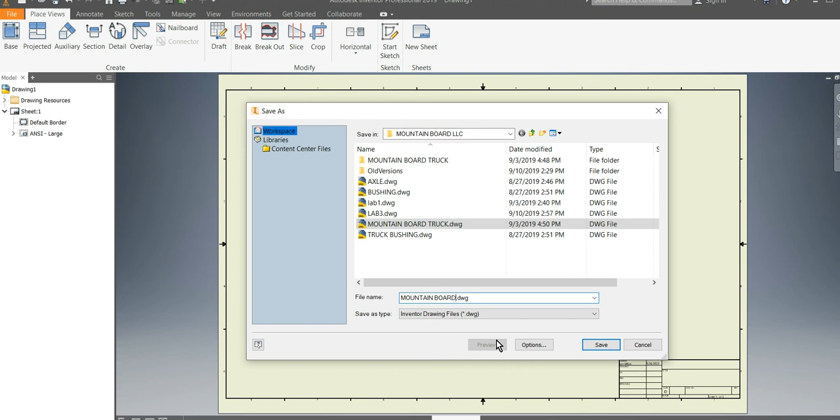To the drawing, let's go ahead and save this. It's good to save it before you drop all that stuff in there usually. Alright, let's go to base. And now I made a snapshot, so I have a view here.

If you can make like 10 of them and pick whichever one you want. So every time you do a snapshot, it's another one available there. 1 to 4, I'm going to try 1 to 3. It gets a little tight with 1 to 3, but it sure looks a lot better. It's bigger, right? Picking another thing, it'll show up.

Alright, now that's a pretty good view. Okay, you can kind of see it. You can't really see these very well. So I would say you really need to go back to this, and I should probably spin it a little bit more so I can see. It's just not a real there. That's better a little bit. I don't know, it's hard to find a perfect one.

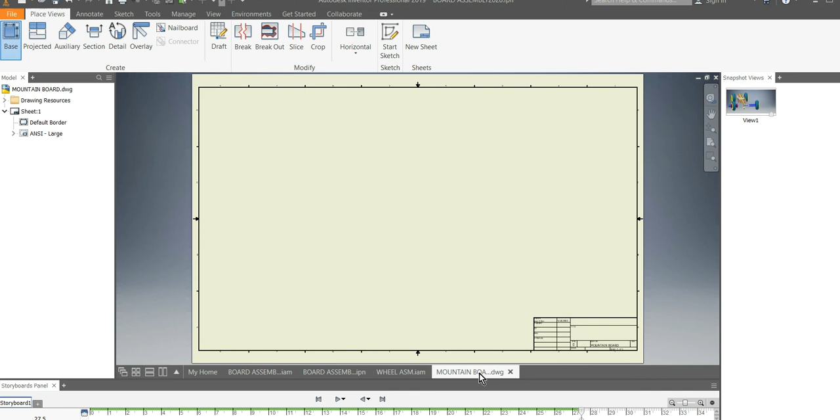But it's nice if you can see these separated too. So I'm going to go with that one. Just do the best you can on it so you can actually see them coming apart. So it is a little tricky. But on mine you can't necessarily see them the best. So the small parts of the truck.

I always make it on something like this. I want to show off a little bit. I'd make it pure 3D. Now a lot of times drawings when you're sending them to a factory won't necessarily be like that, but because you don't necessarily have a color printer either. But so put this where it's going to be out of the way, which would probably be over here somewhere.

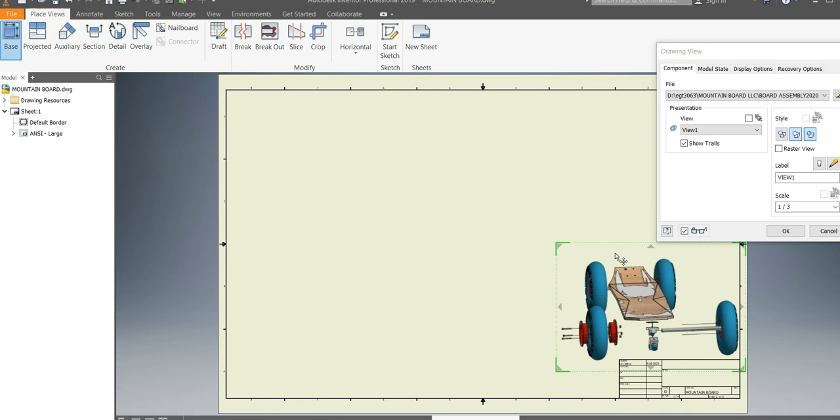Okay, and hit OK. And then bring in another base, and this one bring in your, instead of bringing that one in, go find your assembly, which is, where did I save this thing at? Wheel assembly, board assembly.

Okay, I'm going to make that 3D as well. And that, of course, is not the view I want. So we want to look something like this. You gotta get all those views in there. Okay, so that's my first one, that's my second one, that's my 3D, and that's my section view.

These are my balloons, and you can do so many balloons on each one if you want, or you can do them all at once. Notice I did them on 3 different places so I could see them better. That's the right way to do it. And do your bill of material. Alright.

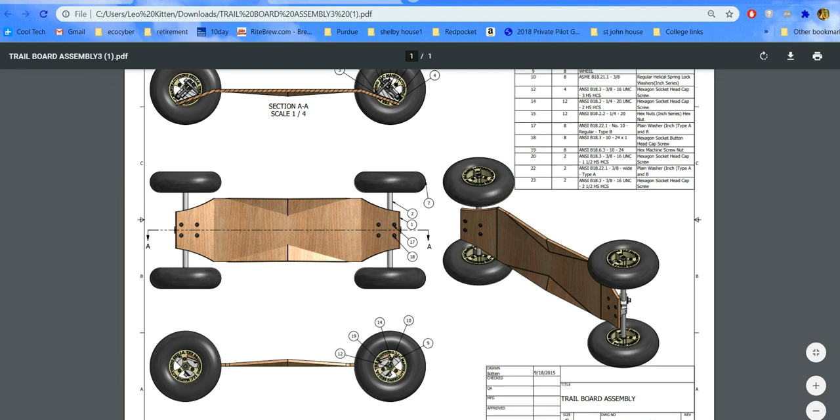So that was the top face of it. So I'm going to basically pick that, get the right face. Finally got it. Put my side view, get my 3D view, and change it to 1 to 3. I probably have to move them all around so they'll fit, and hit OK.

It's not too far off. That one a little bit, move this one down a little bit. Okay, maybe move this one a little bit more too. You gotta watch out, there's gonna be a bill of material over here.

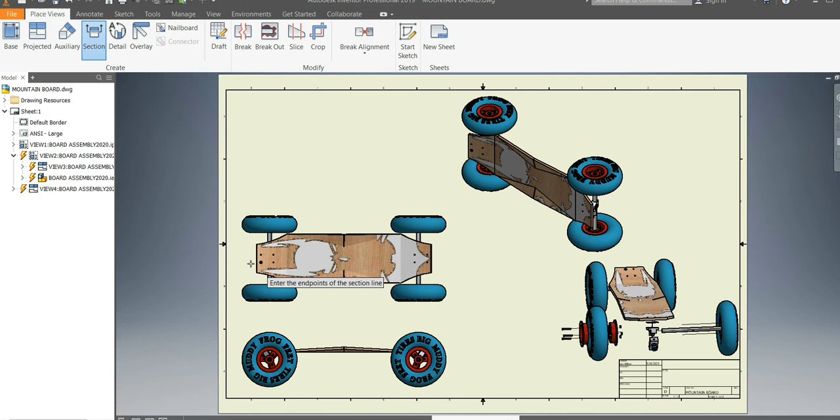Alright, so section views are always section view. Pick your view, make sure you got the view picked, and don't let it pick that hidden line or that little center point. So I should not have picked there. I just picked it, I should have hovered over it. So we're going to try again.